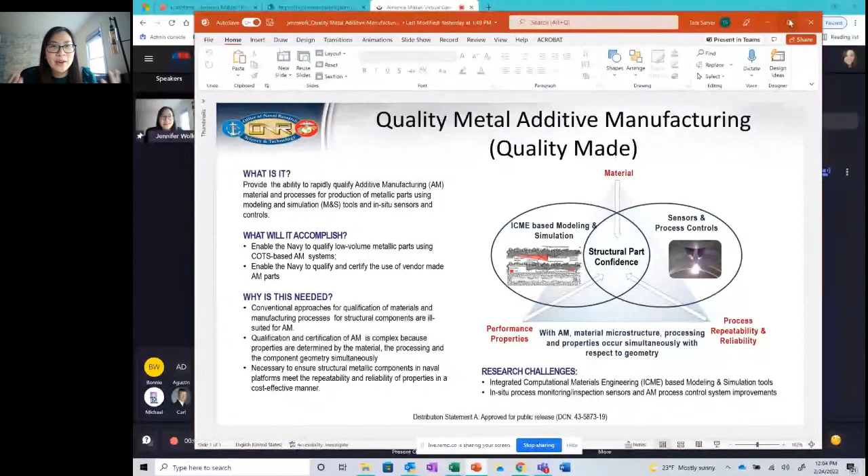Quality Made is the formal name of this program, Quality Metal Additive Manufacturing. What we're looking to do is change the paradigm of how we do qualification and certification. We have all been through the challenges of really trying to figure out, in the world of additive manufacturing, how are we going to build things reliably and repeatably to ensure structural part performance. Conventional qualification and certification is predicated on hundreds of test coupons to ensure we have material that's reliable, we understand the performance and properties, and we have process repeatability and reliability.

We lock it down to ensure that structural part confidence. But additive manufacturing allows us agility, it allows us the flexibility to change things, right? To go from an aluminum one day to maybe a different aluminum alloy another day. So if we want to be able to take advantage of agility, we need to be agile in how we qualify something and agile in that kind of understanding.

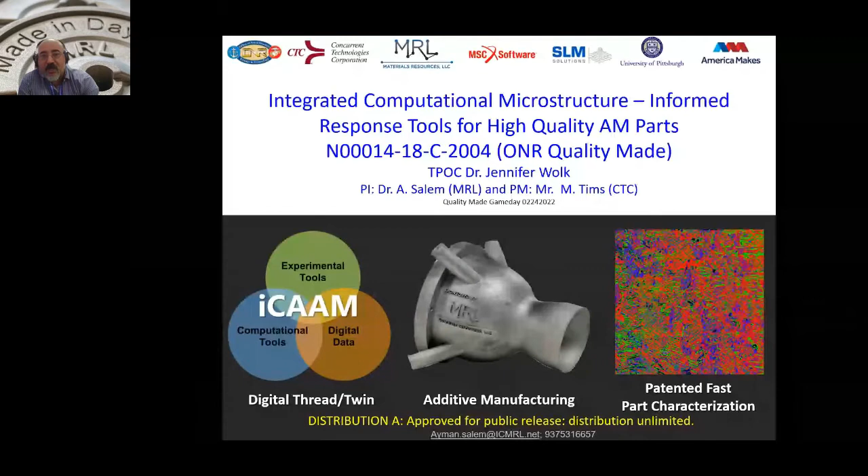I am proud to represent a team where Concurrent Technologies is the prime, and we are a subcontractor to them. Myself as the PI, and Mike Timms from Concurrent Technology as the program manager. Thanks to Jennifer and the Office of Naval Research for giving us the chance to work on this.

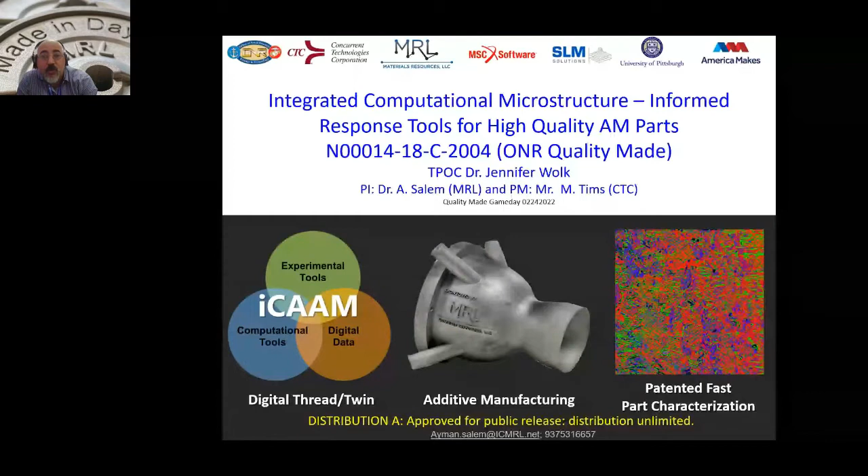Our team members include MSC Software, as well as SLM Solutions, University of Pittsburgh, and America Makes. We are looking at implementing ICME, Integrated Computational Microstructure-Informed Response Tools, for AM parts.

The whole idea, bottom line up front, is to provide the Navy with the ability to rapidly produce and qualify low volume metallic parts, mainly using commercial off-the-shelf laser powder bed fusion machines, integrated with our ICME tool set, as well as integrated with numerical simulations, providing the associated data through a very robust data management tool to enable qualification of the parts.

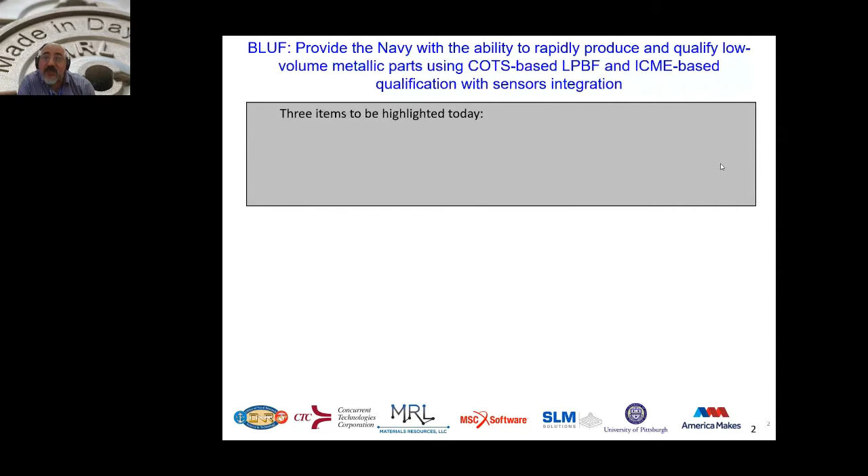With that, there are three items I'd like to highlight today. First, we will demonstrate the ICME-based system on an actual Navy component that we got public release to share with you. Second, we're going to share what we are trying to do to confirm repeatability and reliability at the component level, looking at strength and fatigue behavior.

And at the end, we're going to share our path for technology transition within the DoD, ONR, and also the larger audience on the OEM side.

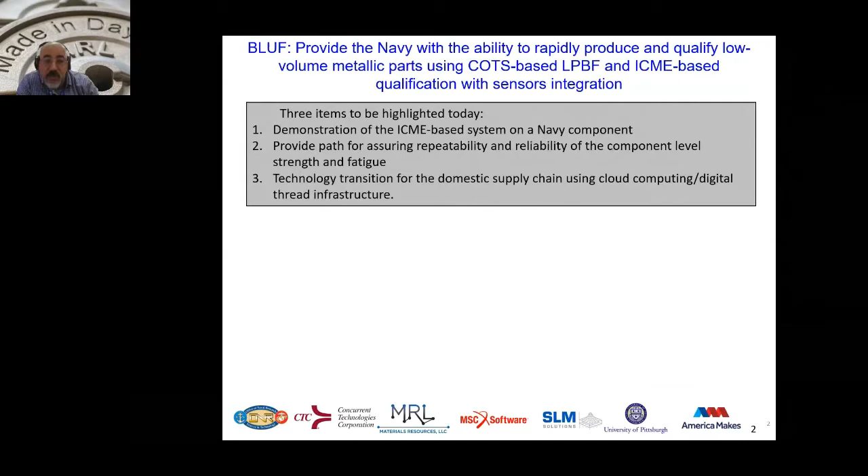Our team, as I shared with you, this is the infrastructure of the team: ONR the stakeholder, and other Navy team members as well, CTC the program manager, MRL as the principal investigator, and the rest of the team, MSC, SLM, University of Pittsburgh, and America Makes. Each one of us is responsible for one piece of this big puzzle we are trying to solve together.

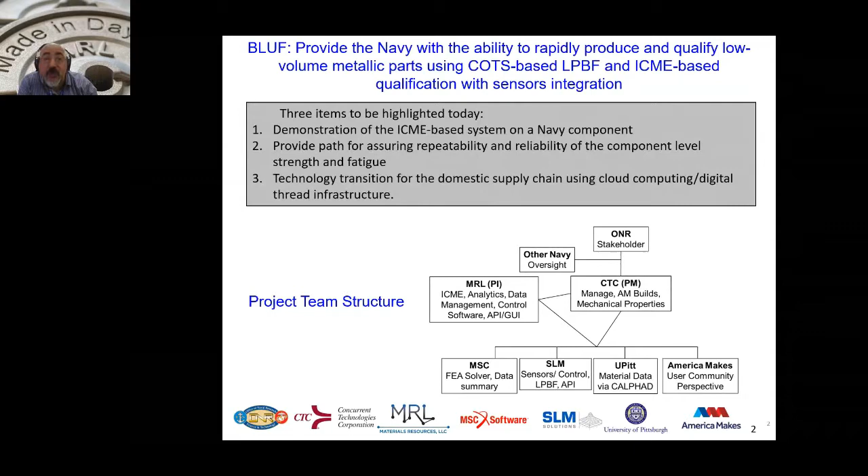Our approach focuses on integrating the cyber domain within multiple modeling and simulation tools within an ICME framework with an AM process, laser powder bed fusion, using the COTS machine SLM280, which is our physical domain, as well as the characterization methods that we are integrating with the results coming out.

With that, the steps we took are to link microstructure to properties and performance. We utilize an FEM solver, SimuFact in this case, with multiple modeling and simulation tools to incorporate material behavior within the FEM solver, as well as within the property predictions.

We utilize our commercial tool, iCAAM, Integrated Computational Adaptive Advanced Manufacturing Toolset, to link microstructure, properties, defect, and distortion predictions, as well as looking at both static and dynamic behavior of the material.

We are integrating with the SLM280 that comes with two unique sensors: the melt pool sensor for melt pool monitoring, and the laser power monitoring as well. We are integrating the tool to utilize the sensor data for defect detection, using the modeling to infer what the sensors are predicting for us.

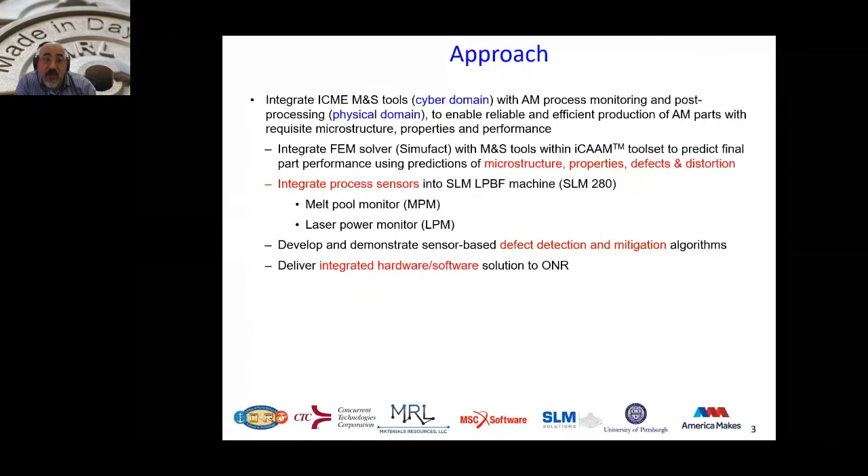And at the end of the day, we're going to develop a fully integrated system that we're going to deliver to ONR by the summer time frame.

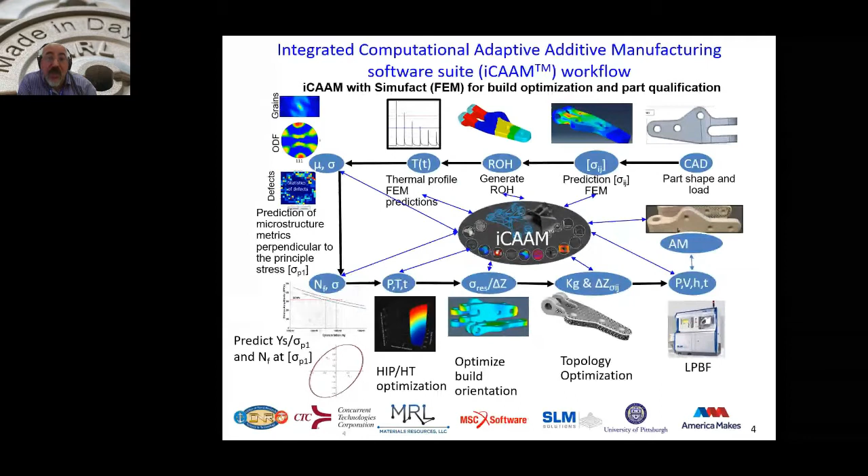Going through this quickly, the integration with the machine is the item I'd like to share with you. This is the current activity that we are working on, and this integration is taking three main steps.

The first one, we were integrating with them on the single, the total uncoupled method, is what we call step number one, where we are talking about the cloud data analytics. They send us information, we analyze it, and we link machine parameters to simulations to sensors data. And then the fog data analytics, where our machine will be taking information on a layer by layer basis, and we are in the middle of working on this.

And then at the end of the day, when we are submitting the machine and delivering it, we will be working on the edge data analytics, where the analysis will be done on our computer connected to the SLM machine on site with the Navy.

And with that in mind, I wanted to share with you quickly, and the image is a little bit stretched. For this case study, made of 316L part, the whole idea is, if we're going to do one or two of this component, we don't have the time or the money to make 100 of those and test them. If we're going to do one or two of this component, how our predictions will enable us to understand the location specific fatigue behavior as well as static behavior, and how that will identify the factor of safety related to it.

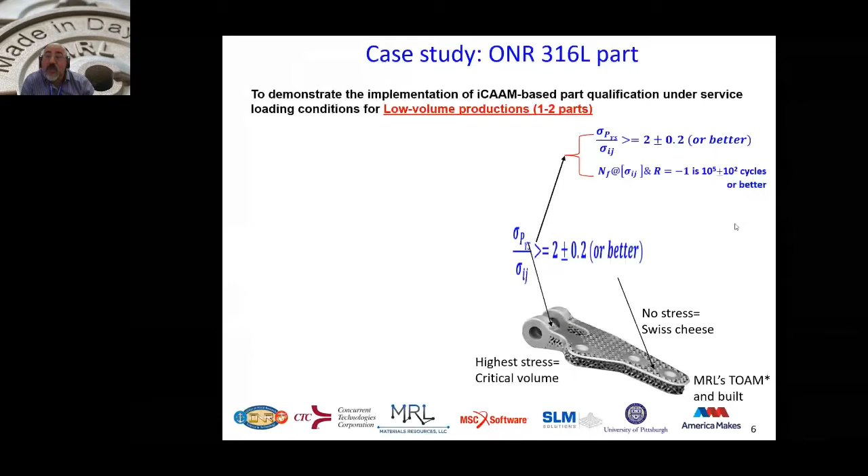So what we are looking at here is to understand some of these fundamental questions that we'll answer through the next few slides. When we are producing this part in SLM 280, can I build the two parts at the same time? What would be the build orientation? What type of machining should I have, and post-processing, heat treatment, should I have or shouldn't I? And when we topology optimize it, how will it look?

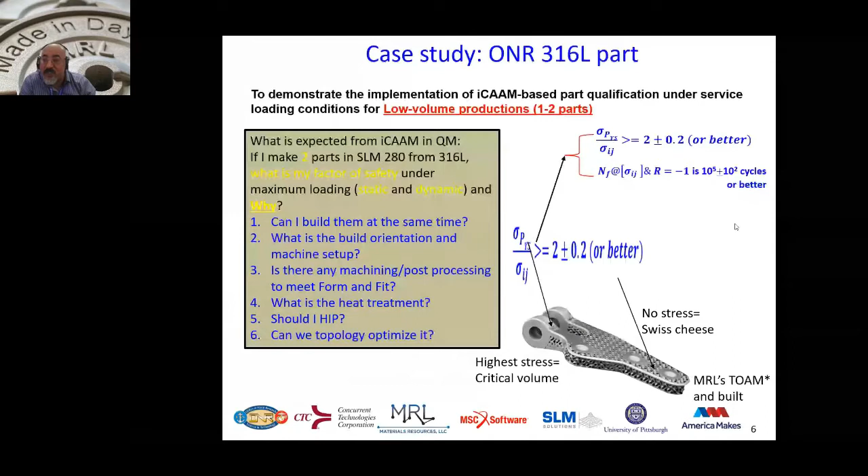So this is a quick slide showing the part in service, and literally how after we produced it, machined it as a solid, as well as after topology optimization. And we did the prediction for the fatigue and the static in advance.

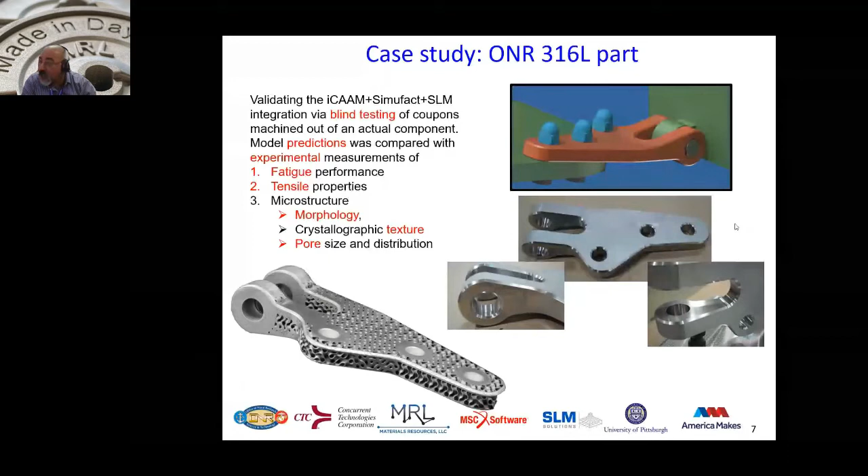And then there is blind testing experimentally done by the CTC team, where they took the part, cut it in pieces, and compared our prediction of fatigue, tensile properties, and microstructure morphology, crystallography, and the pore size and distribution.

The kind of slide you see in front of you is the STL that we built at CTC on their machine with our optimized build orientation, as well as support structure that was for additive manufacturability, and later on also for machinability of the part.

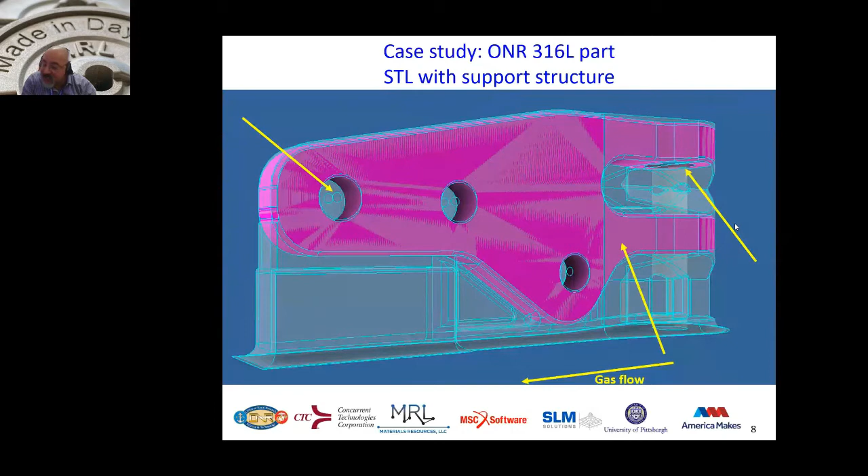Some of the features you see are related to how it will be easy to machine later on. In the details, we identified the most critical location as what we call the region of homogeneity of the feature vector, which takes into account the microstructure variability as well as the resolved stress tensor. We looked at this area to find the worst fatigue behavior.

With that, we put it in relationship with the gas flow. I have a quick slide later to show you how we have a virtual chamber that allows us to take into account the gas flow and the soot, as well as how we are designing certain holes that can later be easily machined, and how we choose them with the distortion, and how we maintain cylindricity of the part. The countersinking you saw was intentionally designed to guide the tool for machining later on. The support structure also controls distortion, and allows us to machine it later with wire EDM with minimum misalignment of the part.

The test plan you see on slide number 10 shows the location we chose as a team to pull fatigue samples as well as tensile samples. For every one of those locations, we had predictions of the fatigue life, the tensile behavior of the material, and the microstructure. Then Mike Timms from CTC later took this data and compared it with experimental measurements through a blind test that was shown to the Navy.

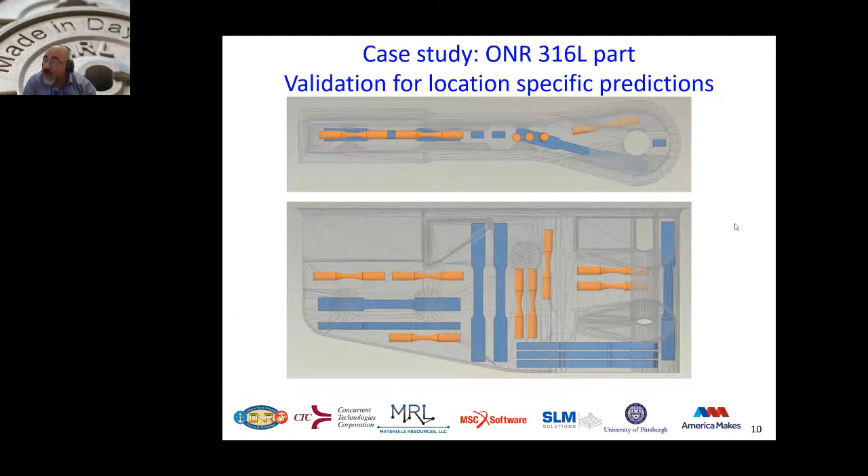Going through the slides again, we'll quickly take you through the process. This is the outline. The first thing, as you see in slide number 12, is that we identified the most critical region under the in-service loading condition, which we define as the region of homogeneity. Here we looked at the whole stress tensor - the 3x3 stress tensor, not just the von Mises value.

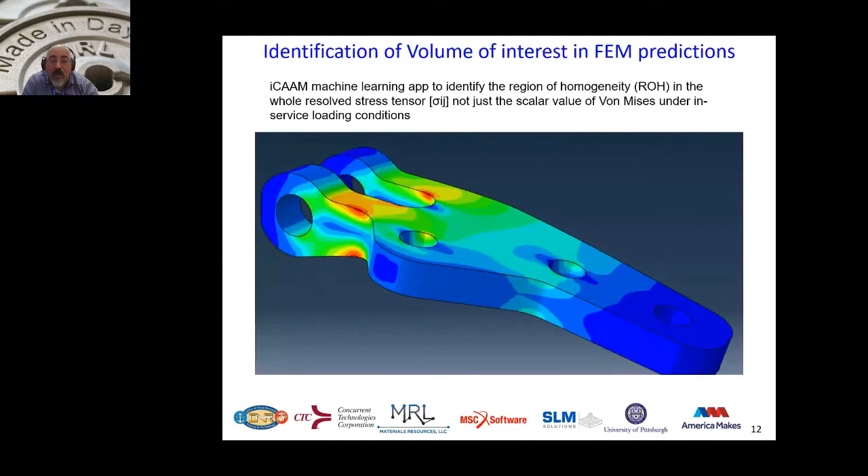With that, we have a machine learning tool to identify the region of homogeneity based on the whole stress tensor. It is generic, so it can be used in other parts generically, not just this part.

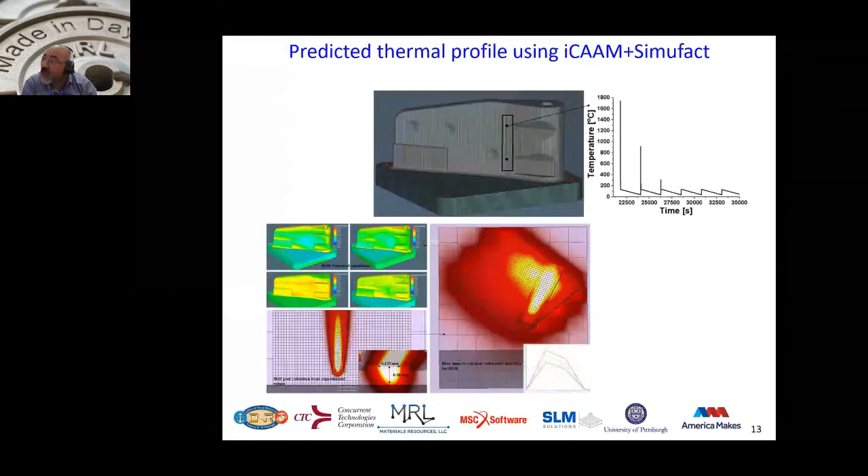Following slide number 13, you see our use of SimuFact tools to predict the location-specific thermal profile as a function of the scanning strategy and machine setup, including the laser diameters, and the calibration we did in-house with hierarchical simulations at the melt pool level, all the way to taking into account the material behavior at higher temperature, not just lower temperature, and then the location-specific prediction of the thermal profile as a function of multiple layers added.

The hierarchical simulation you're seeing on screen now, on the far left, captures the material behavior at the single track level, where we take into account the morphology of the melt pool and how it relates to the morphology of the solidified melt pool.

We utilize a unique trick that we developed at MRL. SimuFact was one of the few FEM solvers that implemented what we call crystal tracking. So instead of handling the whole FEM mesh, we are able to sample it, and some of this information is in the paper referenced at the bottom.

Then we take the information at the single track and go to the single cube, and as you can see, we keep track of the scanning pattern. We have multiple methods that we use to train our models to speed up the simulations drastically.

Again, we utilize the crystal tracking as well as looking at the regions of homogeneity within the part to transfer the thermal information from the single track to the single cube and later to the single part.

You are seeing the single part now being built layer-wise, and the information is fed at the layer level or at the regions of homogeneity, allowing us to capture the thermal profile in various locations. The most critical location helps us predict the microstructure as well as the post-processing we will need to do later on.

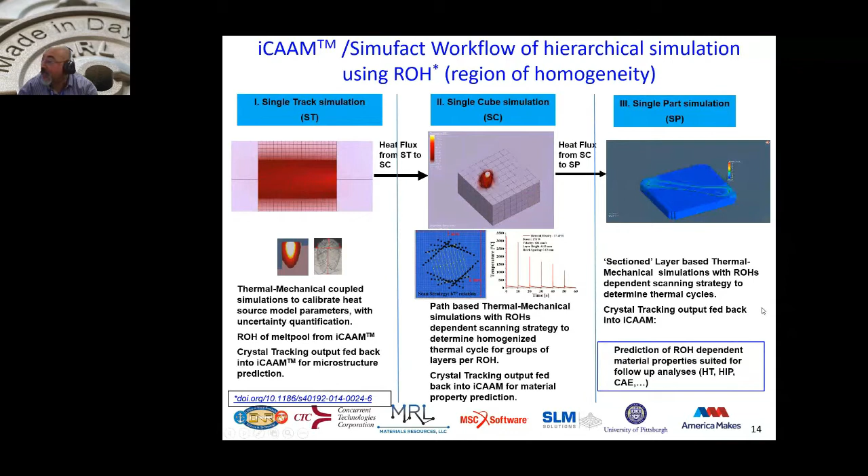With this information, SimuFact was used to predict the residual stresses, and this is some of the orientation that was selected.

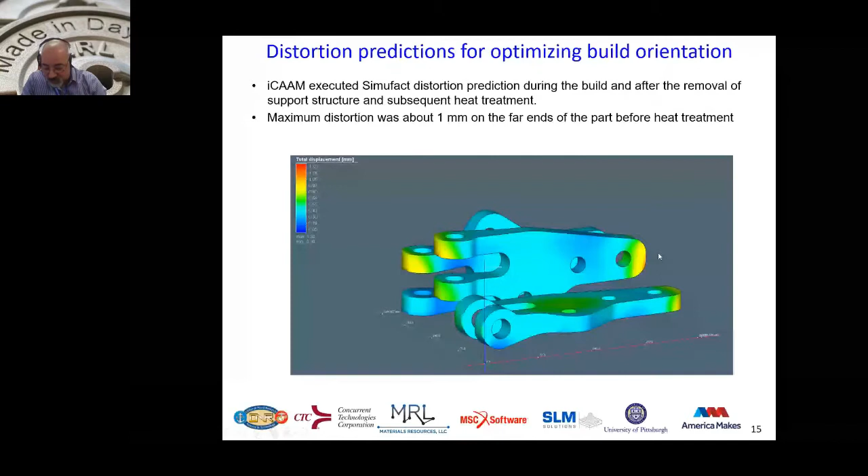We covered the 360-degree available orientation, but from those selections, we were able to predict that the maximum distortion in one of them was about 1 millimeter, but we were able to get the part to have the least amount of distortion as well as the least amount of machining required, and that's the part in the middle. That's what you saw in the prior slides, how we are able to build it.

From the post-processing level, this material is very unique, and instead of going with the conventional heat treatment approach, we have developed at MRL, through another funding from NavAir, an optimized heat treatment for this alloy that allows us to provide properties that exceed the performance of wrought alloys. So you can see we control the cellular structures, and we have to look at the residual stresses and the crystallographic orientations. When we implemented this heat treatment, we were able to optimize the behavior of the alloy, and that's what you will see in the results in the next few slides.

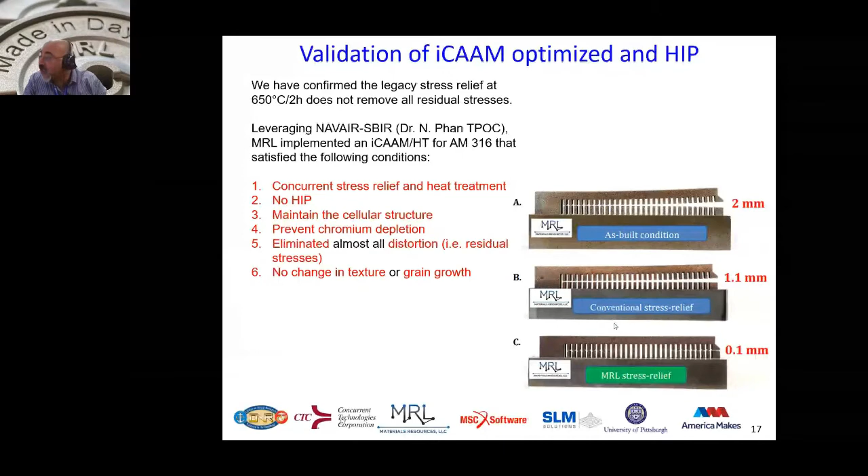What you will see in slide number 17 is comparing the as-built condition with the conventional stress relief process, and then with our stress relief approach. You can see we wanted to demonstrate it in the standard cantilever. The heat treatment approach that we developed at MRL resulted in less than 0.1 millimeter distortion in the cantilever. With that, we calibrated the models that we fed into SimuFact to be able to utilize this part for optimizing the build orientation, to take this heat treatment through the process and optimize the build orientation with it. This is the implementation on the actual part of this information.

When we are developing it, we are able to handle any arbitrary shape, and we are using an optimized inherent strain tensor that takes into account the scanning strategy and the thermal profile, allowing us to see where the location of the highest residual stresses and the highest distortion is. That's even before implementing our optimized heat treatment.

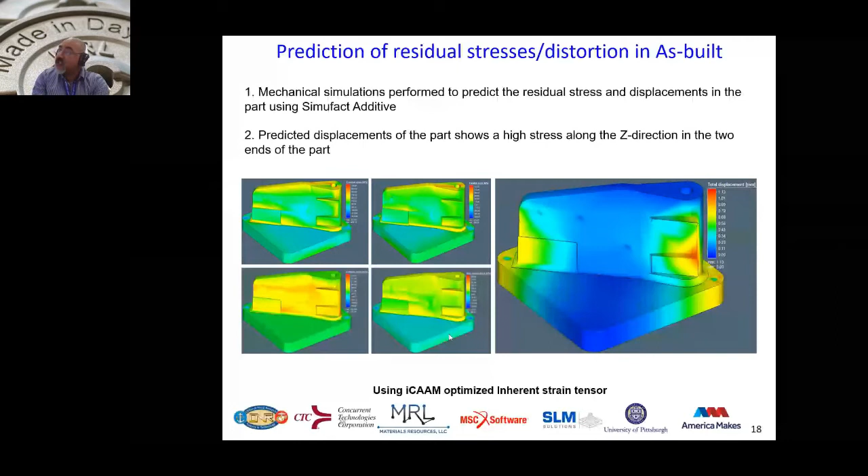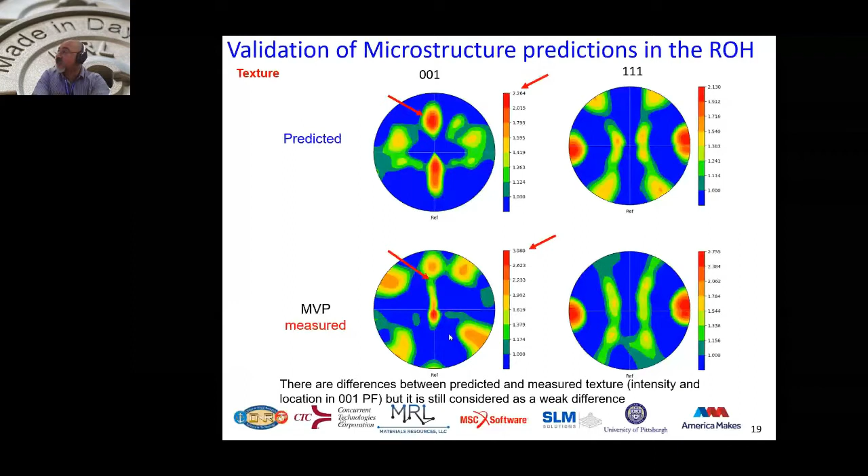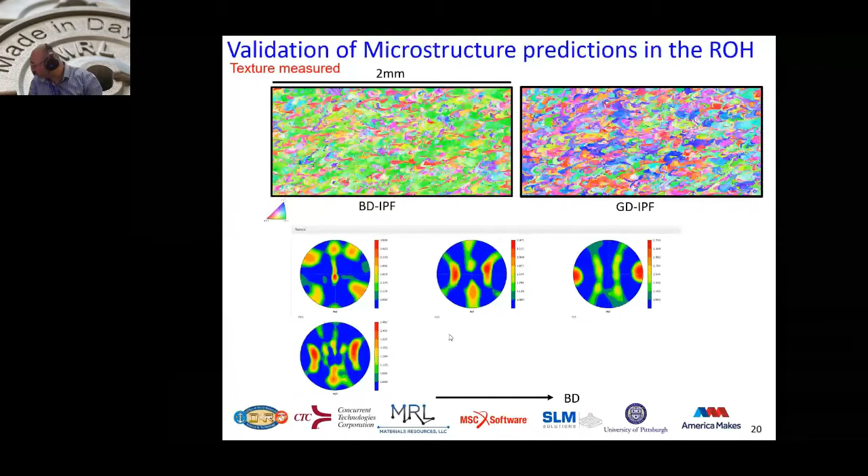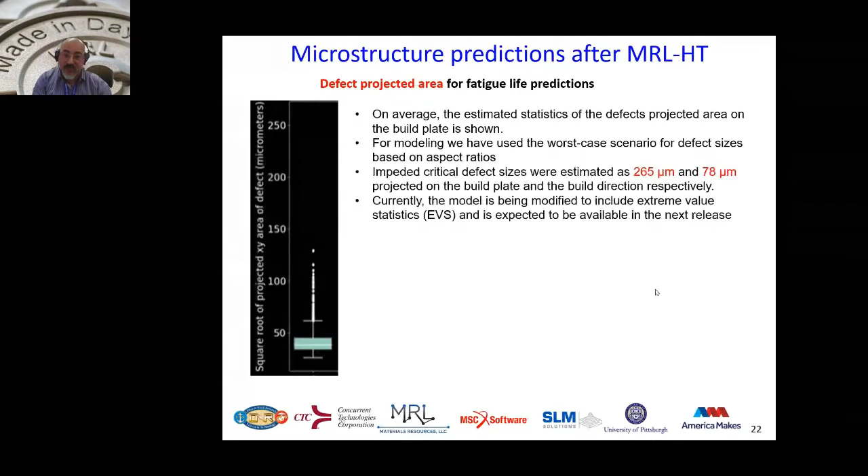One of the important things is that all this measurement was done on coupon samples extracted from the core of the part, at the pre-selected location that we demonstrated earlier in the first cut of samples, where we did both the measurements and the prediction.

The solicitation for this project set a goalpost for us comparing prediction and measurements, shown here on slide 23, where we compared with cast and wrought. We were expected to be within certain tolerances between the threshold and the objectives, and we'll show you how we compare.

This is where we are looking for repeatability and reliability of the data, which was confirmed with the blind test. We did a lot of simulations, predictions, and Bayesian inference, and the results were compared with a blind test using multiple experimental measurements, which we'll show in the next slides.

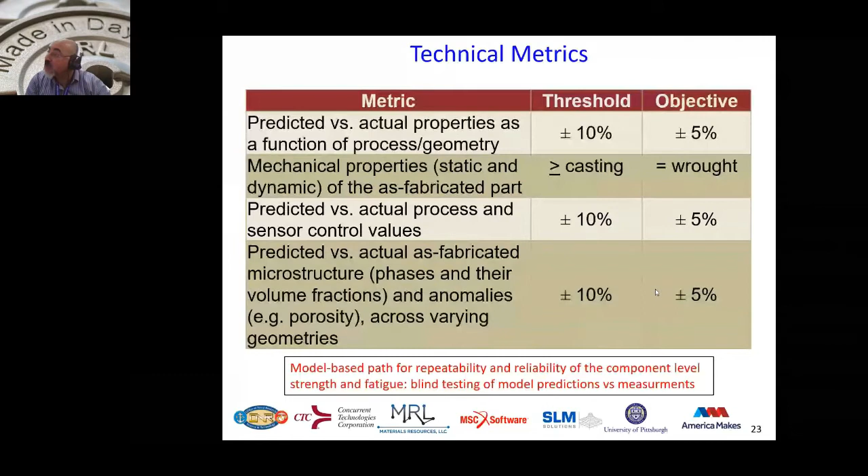So the first thing, looking at this slide, for the fatigue testing, we intentionally tested at 320 megapascal, which was a lot higher than the yield strength of the material, both cast and wrought.

You can see from the literature and the MMPDS S-basis information for the same material that we fatigue tested the material even above the wrought properties, as you can see on the screen.

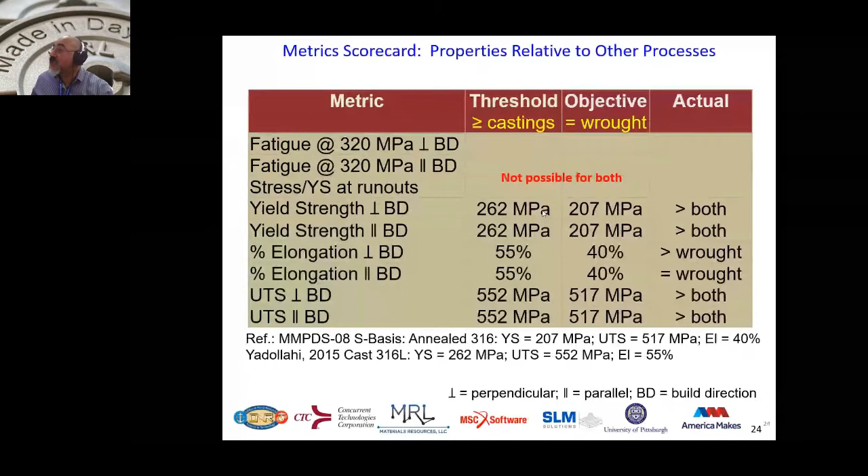The yield strength of the material, predicted versus measured, was within about 5% difference in the build direction. When we reached UTS, we were within about 3% between predicted and measured.

When we came to elongation percent, which has been the Wild West everywhere, the current parameters require a lot of information to predict the damage related to elongation percent. This is where we were a little outside the range, but this material is not expected to be plastically deformed. The approach we're sharing doesn't only apply to SLM.

We applied the same approach in other machines. We applied it to 3D systems, and we are in the process of applying it to EOS machines, and we also have a plan to apply it to RCAM machines.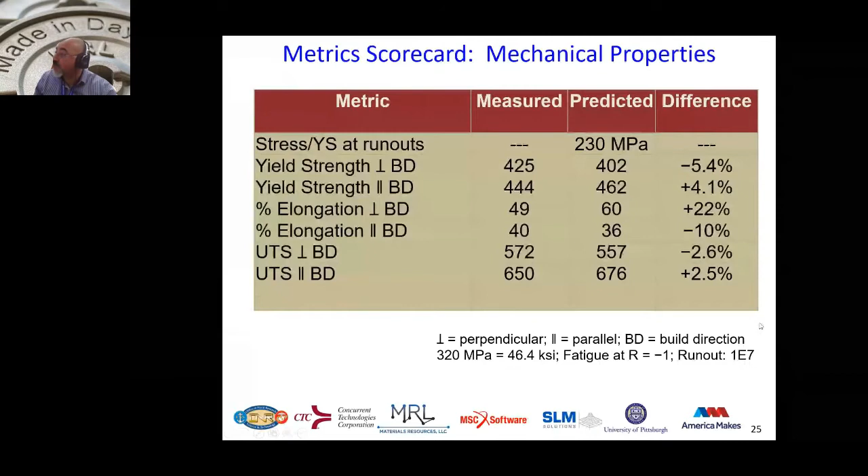One interesting thing we'd like to share: when we did the predictions, it covered both machined and net shape material. The difference is where the defects are located.

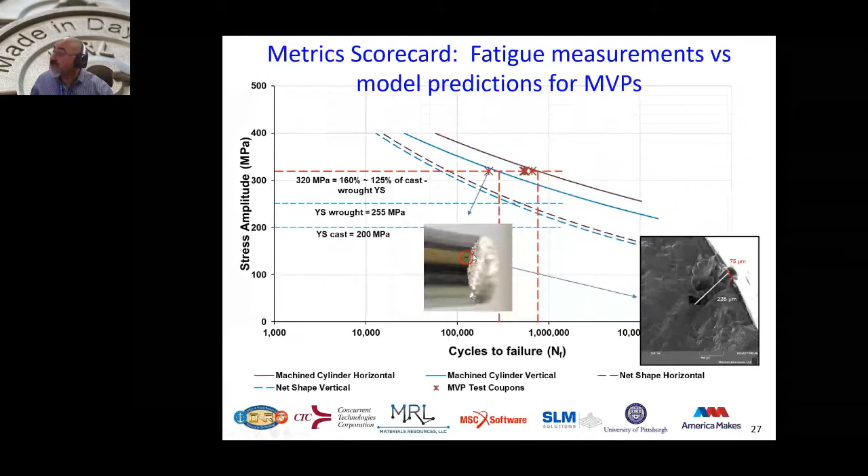That was another unintentional blind test. The prediction for the anisotropic yield surface, as we showed earlier, was within about 5% of the experimental measurements.

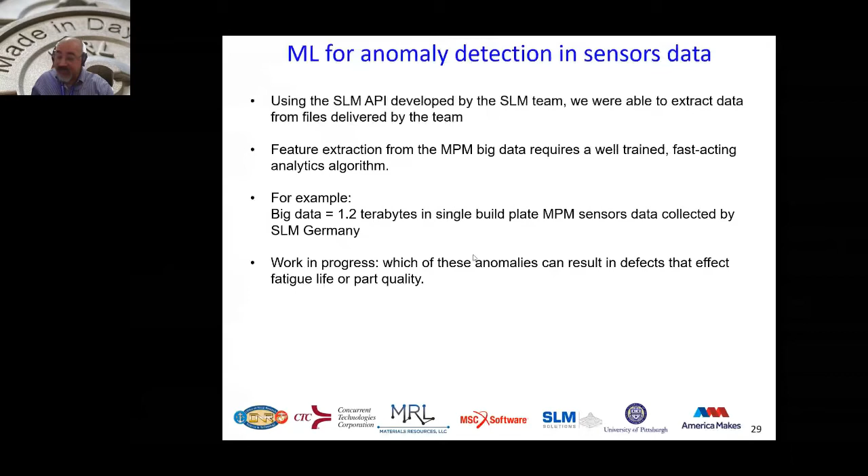We utilize a lot of comparison of the sensor data with the data we generated in-house in prior sensor work, and this is work in progress. What you're seeing here is how we calibrated our machine learning tools using work we did with the Defense Logistics Agency. This is our in-house sensor used to train our tools on the sensors from SLM, the melt pool monitor.

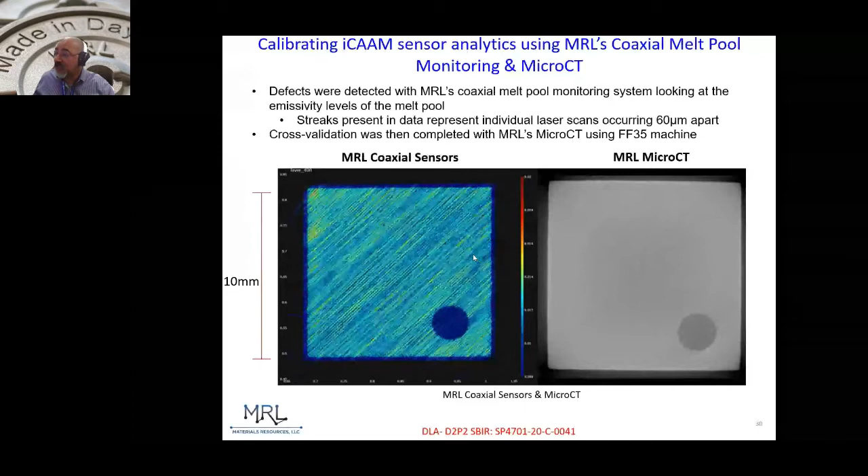What you're looking at is a cube with intentional defects. On the left is the measurement we did with the melt pool monitoring for the photons with the diodes, comparable to what we'd expect with SLM. On the right you see our micro-CT comparing, so we can nail down location-specific defects using sensors as well as micro-CT, shown here in 3 dimensions. We call this the calibration build cube for sensors.

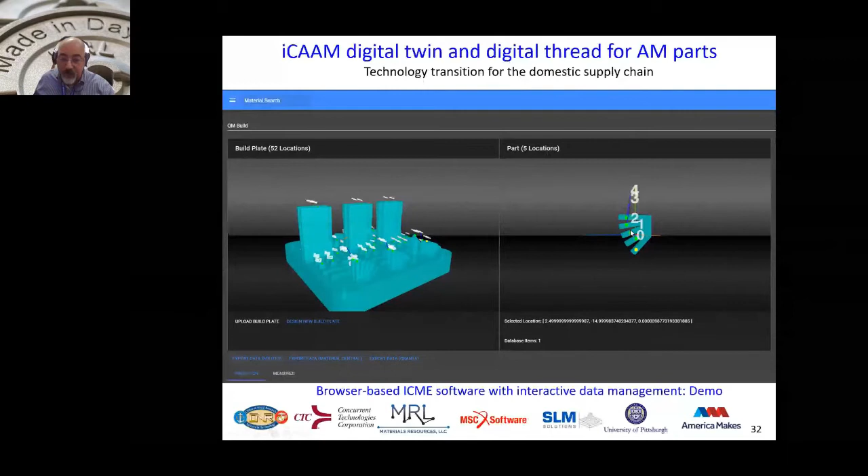When it comes to comparing the data and sharing it with others, I'll share with you in the last 3 minutes some of this browser-based tool we have, a virtual chamber that we're able to control at the part level, at the region of homogeneity. We're able to show the information, both prediction as well as experimental.

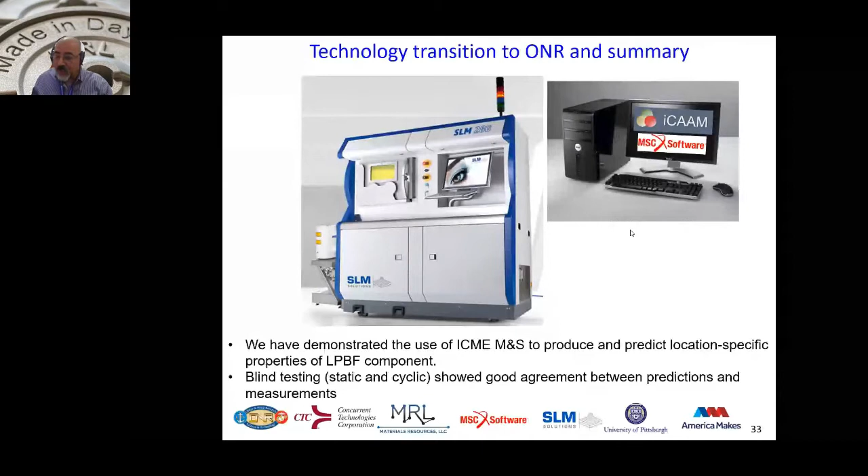By the end of the day, we're going to deliver to the Navy the SLM machine with the ICME, the iCAAM software with MSC tools, and the plan is to have them integrated together so it doesn't require a PhD to run it. A technician will be able to run the tools and build it based on optimized behavior targeted for fatigue as well as static loading.

With that, I'll ask the moderator if we have 2 minutes to show the demo of the software, or I can open it to questions. I'll leave that to the moderator.

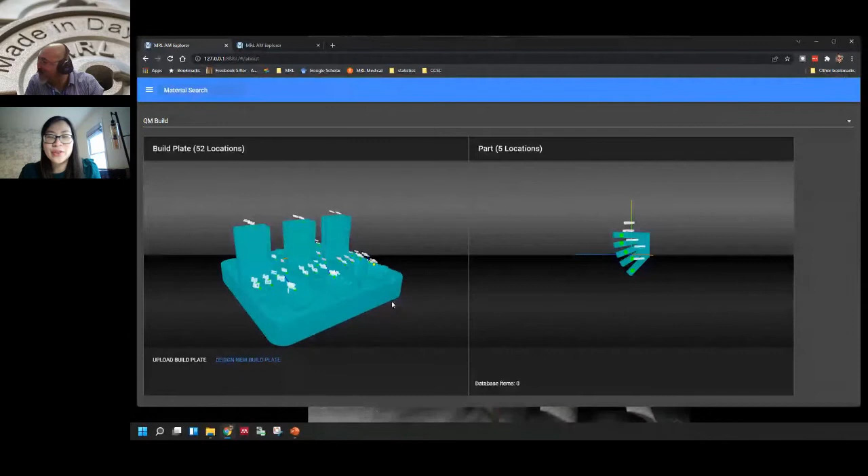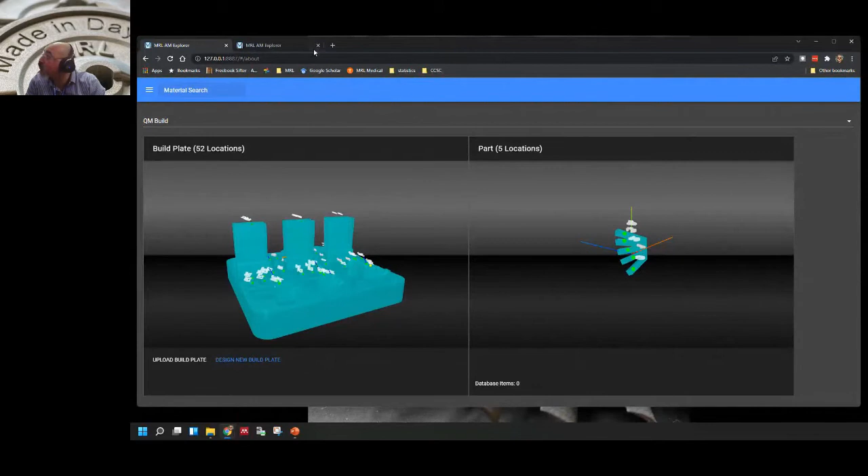On the left you have the virtual chamber that we are training on multiple machines, and we're able to upload different build plates. On the right is part-specific information. The yellow dots you see here are the locations of interest, identified by the region of homogeneity and the user. If you click on one of those locations, you're able to see the prediction as well as the measured information. At the end, once we're done, we're able to export the data in multiple formats.

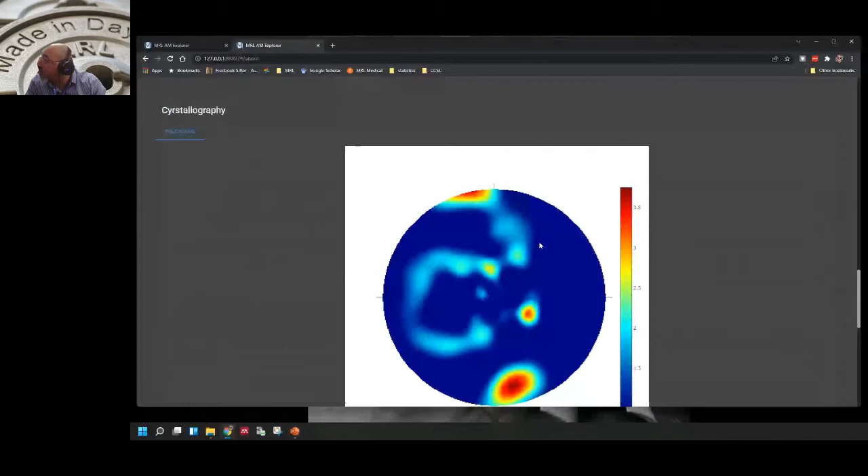One format is a SQLite database that can be read with any SQL database. We're also able to export it for Material Center, part of MSC software, and also export it to a Granta database. From the prediction side, as we shared earlier, we captured the change in chemistry due to the build, the higher order statistics, and the texture.

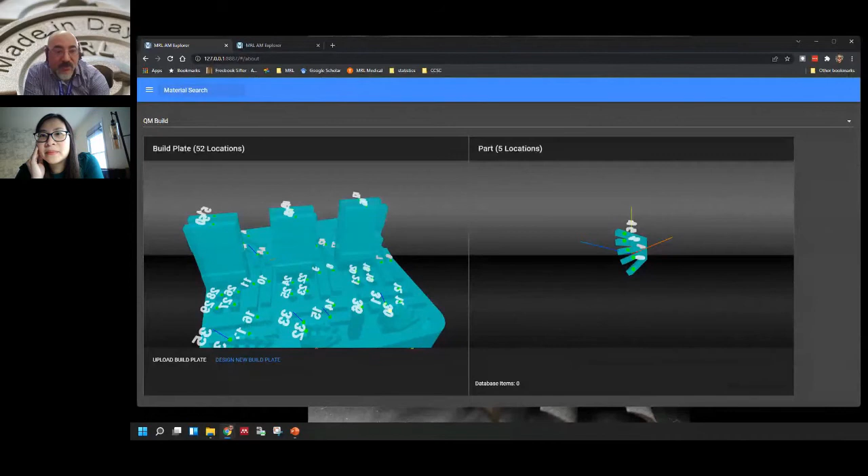How does the mesh of the thermal model translate to the mesh of the microstructural prediction? This is where it comes to the paper I shared with you on crystal tracking. We developed the methodology independent of the FEM mesh altogether. SimuFact implemented that very well. They use what other tools call particle tracking, where you have a marker within the FEM that averages the information and exports it. Once exported, you have a material model that doesn't need a mesh. What you have is a database of the thermal profile as a function of location, which you then call with the crystal tracking. The crystal tracking is volumetric information between four corners, and we demonstrated that using the deformation gradient for large plastic deformation in the paper published in 2017.

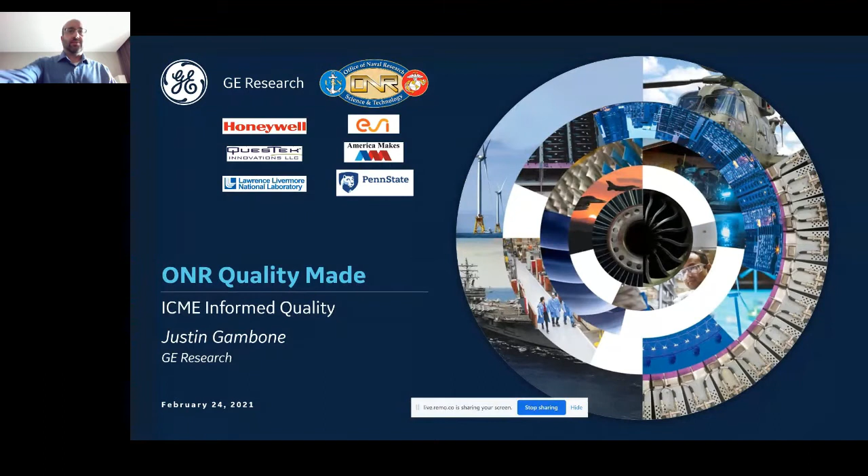So I'm Justin Gambone, from GE Research, working in conjunction with GE Aviation, Additive and Power. We are the corporate division of GE, and I am the PI for the ONR Quality Made effort that GE leads, the ICME Informed Quality Program. With this presentation, I'm going to run through a few different technology areas. Before I dive into the actual technology, I want to ground us in what we're trying to do for this program. For part qualification and certification, there's a variety of developments and procedures in place that really allow the progress of qualification of a part to be elongated, so it can take some time to get through all of these steps.

I'm not going to go through all the details here, but everyone on the line is aware of these challenges. Qualification means you have to complete your first print, get past build crashes, move towards conforming geometry, and eventually towards more material-specific questions and low-rate production scalability.

Similarly, for certification, when scaling capabilities of additive manufacturing across more machines and a full fleet, you have to look at how things can change in the additive process and ensure everything stays consistent and within spec. I'm using this as the framework for today's discussion to talk about how the quality made effort fits into these paradigms.

Let's talk part qualification first. The impetus behind this quality made effort that GE is leading is around taking insights and developments from process qualification. When working with a new machine architecture or new material, we go through a qualification procedure for that specific material to formulate all the knowledge in a more representative manner that can be leveraged toward part qualification and certification.

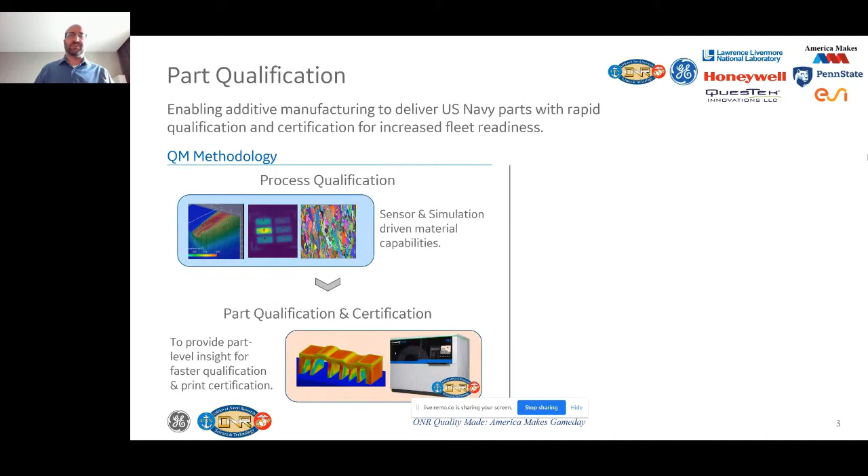So all of our material insights, sensors, controls, and simulation capabilities from process qualification are used to pull more of that knowledge toward part-specific areas so we can more quickly move through part qualification and leverage it along the certification pipeline. By doing so, we're looking to augment and accelerate every step along the way for a part qualification procedure.

On the right side of my slide, I have the five toll gates shown previously. With quality made, we have a variety of technologies meant to build on top of one another, allowing us to more quickly iterate and converge on solutions for each of these toll gates.

Just shown on this slide are a few tidbits of the technology areas. For completing a first print, we have orientation optimization, taking into account overhanging regions of a part, support generation, and recoater interactions to identify the best potential orientations of a part in the machine.

For geometry, thermal simulations allow us to understand part distortion effects and compensate for them so we can get to CAD conformity more quickly in the part development process.

Feature quality leverages an intelligent feed-forward control strategy, giving us more localized control of our additive process. When needed, we can adapt our process procedures to account for variations in the geometry, which induce differences in melt pool behavior during the print process.

Material quality leverages quite a bit the ICME-driven material prediction capabilities for Inconel 625, helping us understand the reliability and robustness of the end result material quality.

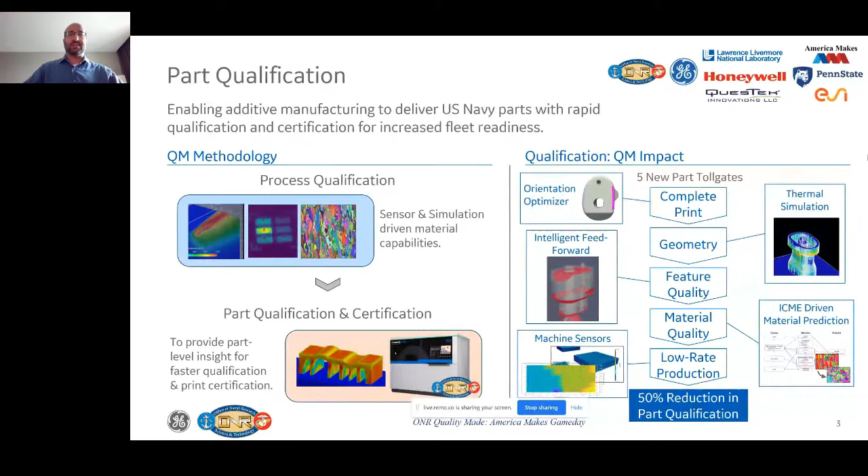As an end result, all of this is meant to drive towards faster part qualification. We have to do all of these steps, hitting every one of these toll gates with acceleration technologies to see a major reduction in part qualification time.

My example today shows how we interconnect some of these technologies to accelerate and pull insights from process qualification to part qualification, around intelligent feed forward and its convergence with simulation. Intelligent feed forward is a technology developed out of Lawrence Livermore National Lab, one of the members of our team, that looks at doing localized process control of an additive part.

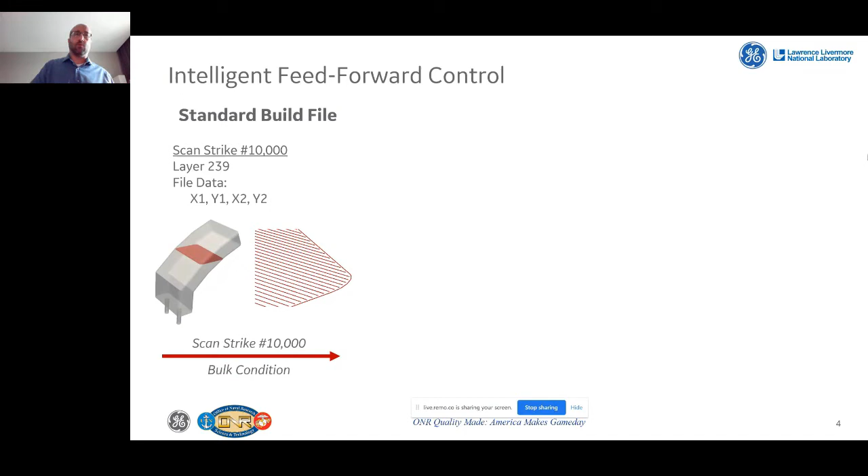The procedure we take is to create a standardized build file, essentially a template for the part being generated across the 3D geometry, and put that through an analysis, doing feature extraction to identify where certain variations in the scan path occur during the print process. In this example, we're looking at regions where an overhang can occur.

We're essentially looking at a laser strike during the processing of this part, trying to identify where we start approaching the overhang region. With segment 123 shown in the center of this slide, it's the bulk region of the part. But as the laser strike goes closer to the edge, towards that overhang section, we identify that very far edge, where 128 is earmarked as the first layer above an overhang, and 127 is the second layer above that overhang.

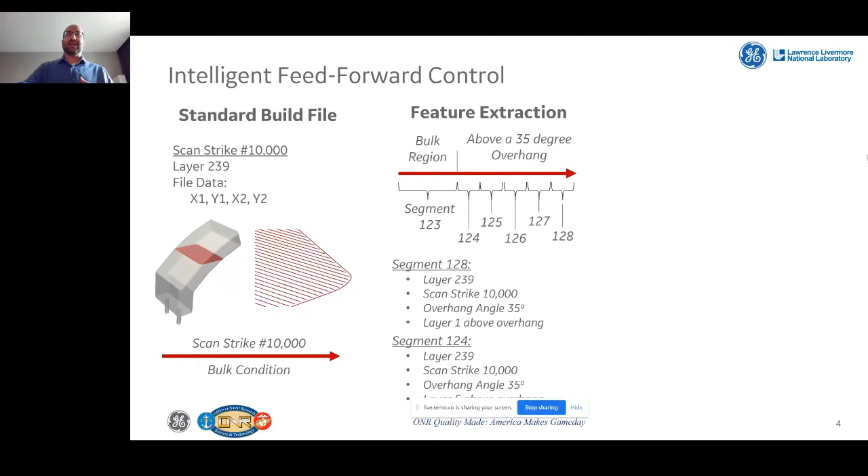This type of demarcation of process variation along that laser strike allows us to have more localized compensation and control, giving us a more measured response to that change in process behavior.

So taking that single laser strike that goes from a bulk region towards an overhang, we can take that same continuous laser movement and modulate the laser power or focus along that length, creating a gradient that steps us towards a more optimized scan strategy for an overhanging region of a part.

This allows us to have no stops and starts, but gives us a smoother transition between different features of parts and allows more tailored features as required.

When we look at this type of technology, this control methodology on the machine, there's a lot we can consider: 1D features, like what direction the scan strikes are going; 2D features, more area-based understandings of wall thicknesses; are we entering a corner of a part or not?

Then there are 3D features: the level of an overhang, the height you are into a part, how far from the build plate you are. For every laser strike, you could have many different types of features associated with it—an overhang region that's also a corner, or a tall section of a part that's also a very thin wall. It's important to understand all these variations and use IFF to accommodate changes where it's actually important.

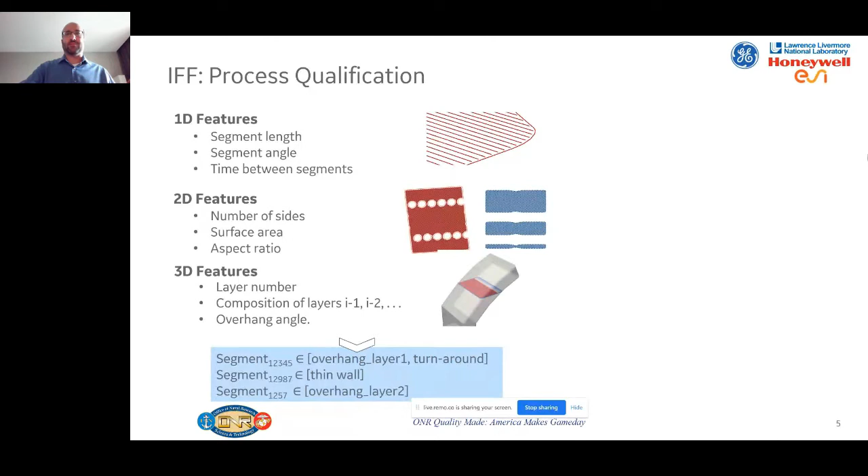To help accelerate this, we started tying in simulation capabilities. For this example, we're taking intelligent feed forward capabilities for scan path control and leveraging thermal simulations developed by ESI in association with Honeywell to look at strike-by-strike material response of a geometry and see what the thermal response looks like for that part.

We're looking at individual strikes associated with the IFF outputs to see how the thermal response changes, in this case regarding the overhang area and the length you are into an overhang, to see what the thermal variation can look like. This allows us to identify if a feature matters, how much so, and how to control it.

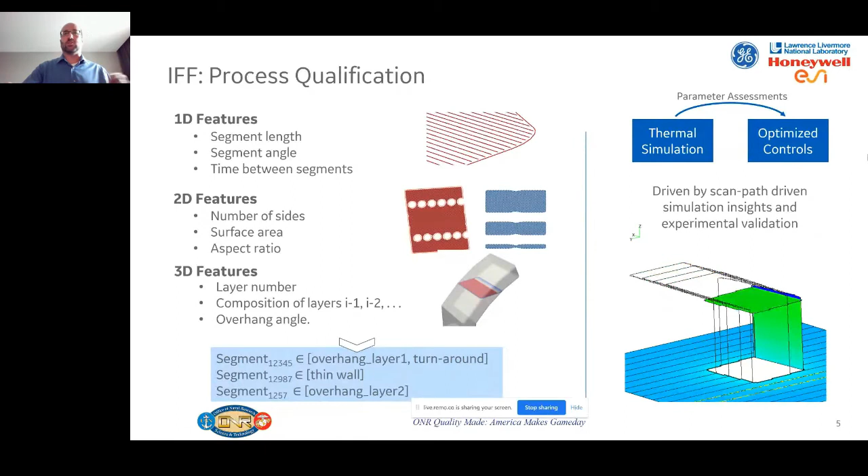So we're able to pull thermal simulations to have optimized control during our process qualification stage. But furthermore, we can leverage this in the part qualification procedure, now having tailored control strategies around critical feature sets we know we need to control better in the additive process, and we want to leverage those in part qualification.

IFF itself, Intelligent Feed Forward, is meant to take those same feature sets developed under process qualification and apply them to new geometries, identifying similar feature sets when we go to a new type of design. Furthermore, we're able to close the loop between the controls and that thermal simulation.

We can run that same thermal simulation strike by strike on a new, tailored geometry that we're looking to do process qualification on. It can provide assessments around thermal buildup of regions, show optimal orientations of the process, and give an understanding of the impact of our tailored control strategies.

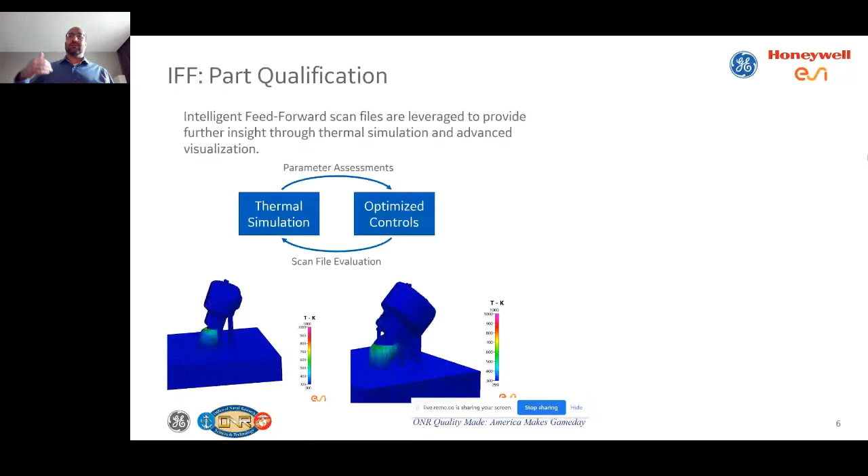Taking this a step further for intelligent feed forward control and this level of insight into scan path control of an additive system, we can illustrate how scan paths are applied to a new geometry, informing the qualifying body of where and how feature sets are flagged and identified through advanced visualization capabilities—going a step beyond what's typically seen for additive technologies, where you look at essentially a layer of the scan path at a time, shown on the slide here along the right.

We're now also able to overlay these same type of scan path controls with the CAD model, so you get a one-to-one view of where and how control strategies are being added or used to mitigate new types of design features.

A step beyond that is looking volumetric, at the entire 3D body of a part geometry, flagging or showing regions where certain feature sets are found, identified, or controlled using intelligent feed forward.

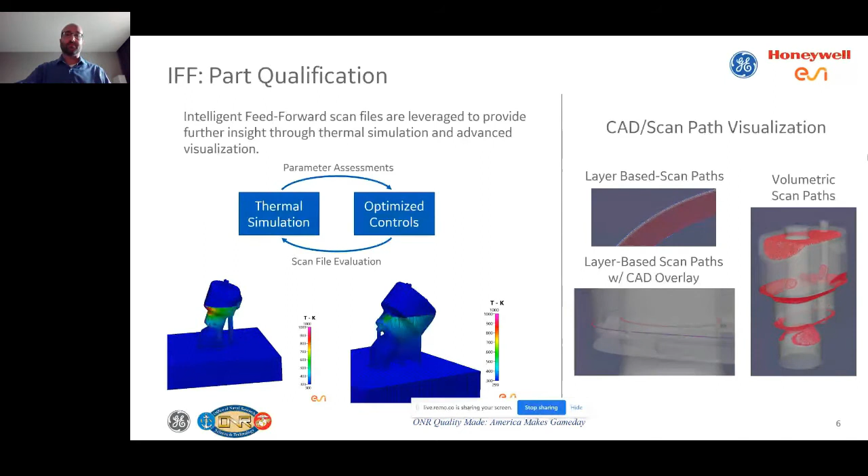This CAD-oriented understanding of process space is also the same metric used for thermal simulations. That's one example of how we're trying to leverage advanced controls and simulation to provide faster insights into a new process, and also leveraging our process qualification towards new parts.

I also want to touch on certification. It's an important aspect of additive manufacturing that we need to understand better and push ourselves to characterize as we scale additive manufacturing beyond just a few units. Qualification is about proving the capability of a new geometry to show consistent properties relative to our process qualification, while part certification is really about consistency.

We know we have a good geometry, a good scan path, a good build process parameter, but now we have to make sure that as we scale from one machine to 50 machines, and those 50 machines from a single build to years of operation, that we keep everything in check.

That means system level inputs, making sure our material feedstock is adequate. Our build process, ensuring we have consistent build environments during the build process across that fleet of systems. And even post-processing, looking at powder removal or heat treatment and ensuring consistency in those regions.

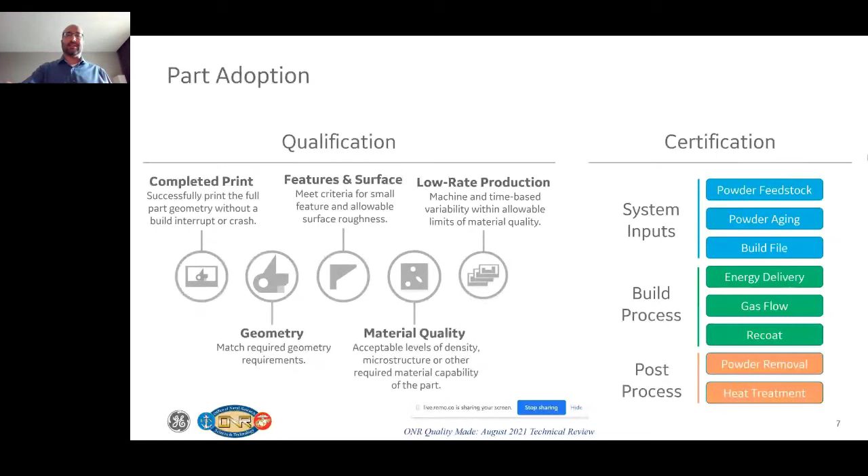It's important for us to understand the bounds of these, but also be informed of why those bounds exist, because when you scale additive manufacturing, things are going to vary. With different sites, different operators, and over a long period of time, things will change in the process, and we need to be ready to answer questions when we find those deviations occurring.

For the Quality Made program, we've leveraged similar technologies to those shown in part qualification, now applied to part certification. We're using sensor-based systems developed by Penn State, a coaxial multispectral sensor that looks down beam at the melt pool behavior.

Penn State is also looking at the build process from a gas flow environment, creating a new module that goes into the chamber so we can measure gas flow across the build region in as unobtrusive a manner as possible. Another area I'll touch on next is ICME simulations.

We've leveraged ICME simulations in part qualification toward optimizing heat treats and understanding the resulting impact on mechanical properties. We took those same simulations further to drive insights around powder feedstock and heat treatment profiles, diving a bit more into this ICME-driven insight.

We have a fairly complex ICME model that takes into account the initial chemistry variation of the part, as well as the different types of heat treatments seen during the build process or post-process steps.

Once we built that type of model, we immediately started asking questions around what if the compositional variation of the feedstock powder changes? Even if it's within spec, what if it's at the upper limit or lower limit? What if it's out of spec?

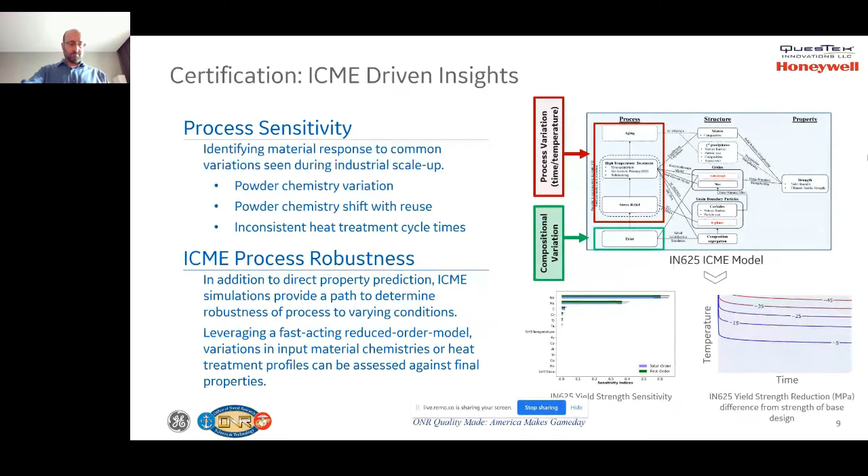And then finally, the last area I want to touch on towards the certification end is again the sensor-based aspect. I already touched on this, but during the print process, we want to ensure that the build chamber and our build process procedures are consistent print to print and across fleets of machines. So we have integrated a sensor system into the additive process that allows us to look at narrowband spectrum

of emissions of the melt pool itself, so we can understand where and how process variations occur. In addition to this, we've also developed with Penn State a calibration procedure for this. Actually, that led to the gas flow sensor that was shown previously, a way for us to get a calibration module within the chamber unobtrusively so that we can get the right information to level set the sensor across a fleet of printers and also a printer over a long period of time.

And what this provides us with now is a calibrated data set for each print that we can then understand the impact towards process variations and inform NDE experts around changes in that process and where and how they occur.

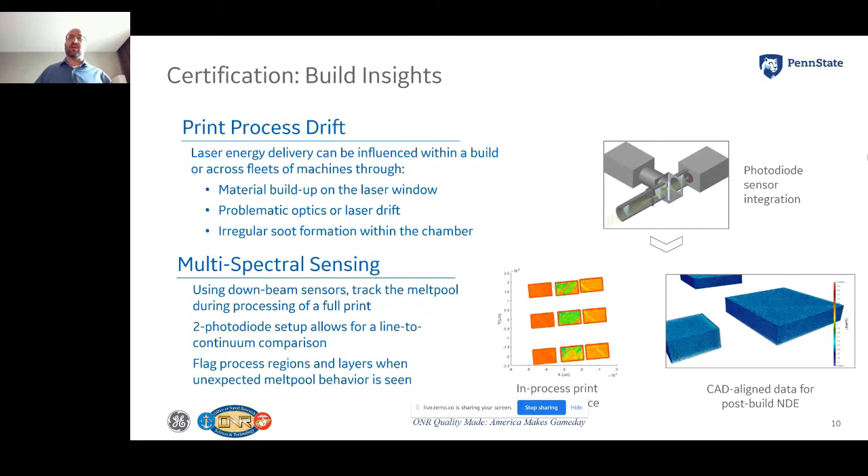So overall, just walking through a few examples of this ICME-informed quality program that we have in conjunction with the Navy, where our next steps are really pushing towards transitioning this technology to Lakehurst site with a Concept Laser M2 system, integrating the sensor work and all the different software and simulation capabilities.

Now, at its heart, this program is a technology framework that combines advanced simulations, controls, and advanced sensors so that we can understand and better predict the build process. But also, by aligning all those bits of information, we're able to start really leveraging the additional understanding that each provides so we get higher confidence in a new part geometry as we go through part qualification, and can refer back to that same type of insight as we go towards part certification.

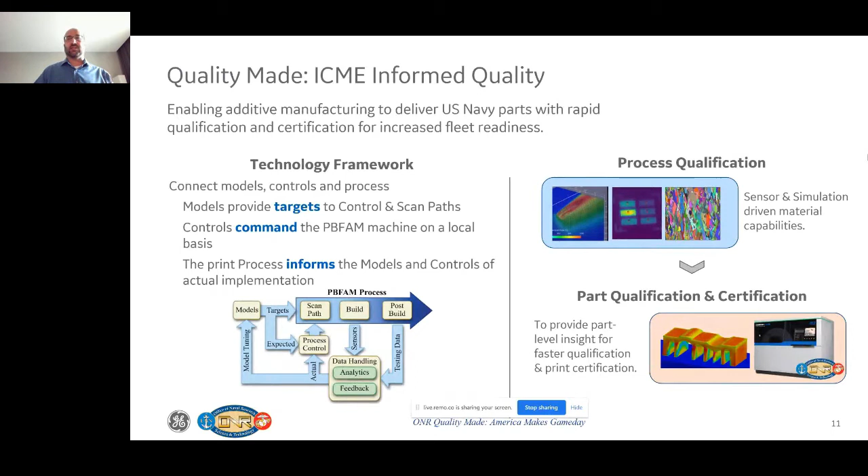And with that, I think we have some time for questions. Happy to answer anything that may come up.

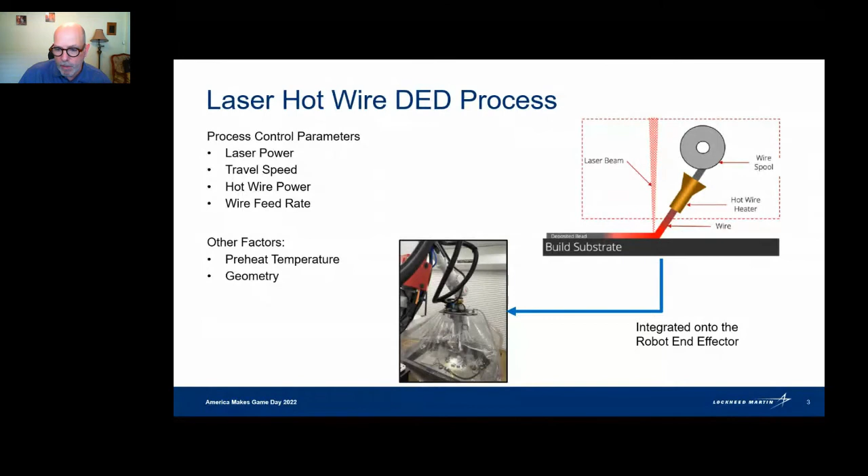That requires an inert environment, which we obtain using literally a tent, if you will, to purge the environment while we're conducting the build. The reason we do this is because of the specific system we use—this robotic system you see here—and I'll get into more detail on that in a moment.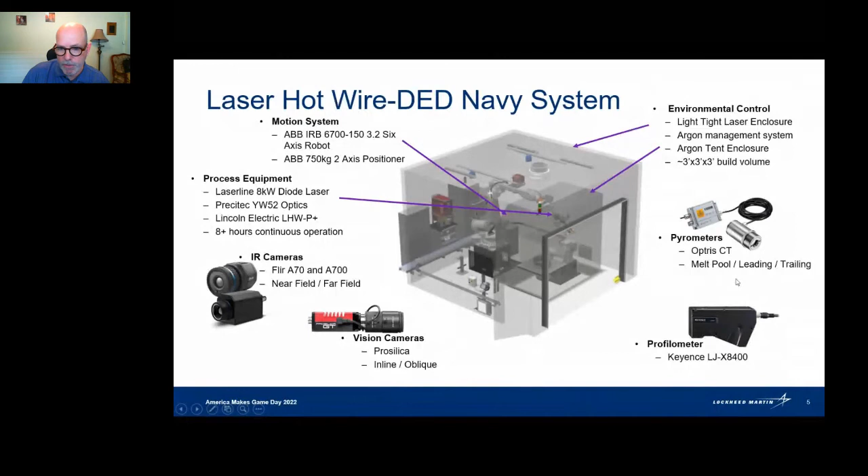Essentially, we've had a fairly determined build progression. When we initially started this project, we laid down simply bead on plate. We didn't even try to build upon the laid down beads, just to get a better understanding of the process control itself, and what the process windows look like - what our schedule parameters are. I mentioned those 4 different control parameters, what those parameters look like and what they produce within a given boundary. So we used that to get a reasonable approximation of what a good set of schedule parameters would be.

We progressed on to doing stacked walls, is what we called it - basically just one bead on top of another. There's not 2 beads aligned here, it's literally just a vertically stacked wall. And then we went on to build large block builds that are multiple beads across - multiple beads going across, and then multiple beads stacked up.

We went on to build a more complex geometry. Unfortunately this isn't the best view, but essentially this is a large wall build with another perturbation wall that's a single bead layer going up, and is actually angled down as it goes out. So we progressed to that more complex geometry.

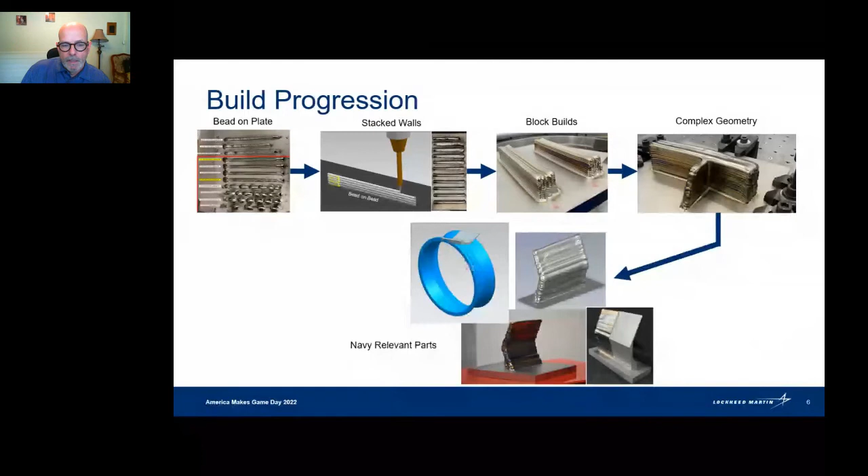One of the first things we did, I mentioned process maps. So what Jack Beuth and his team learned initially was that we needed a process window within which we could have a reliable deposition, and something that would deliver a good quality deposition in each different bead that was laid. So it's important to deliver the right amount of energy into the melt pool.

So what you see here is that Jack Beuth and his team have defined what they call a remelt ratio. Basically, depending on the process parameters, how much energy you're dumping into the material, as well as how quickly you're feeding material into the melt pool, you will remelt some of the material in the substrate or the previous builds, and then add some melted material. Jack's come up with a formulation for remelt ratio.

And then he developed these process maps. The essential part of these process maps - they are color coded, and you might guess the red section is a place you don't want to be, and the highlighted green sections are really what I'd call the sweet spot. So through a variety of experiments, a DOE if you will, on the more relevant process parameters - the total power, the velocity, which is the travel speed, and the wire feed rate - we've been able to define these.

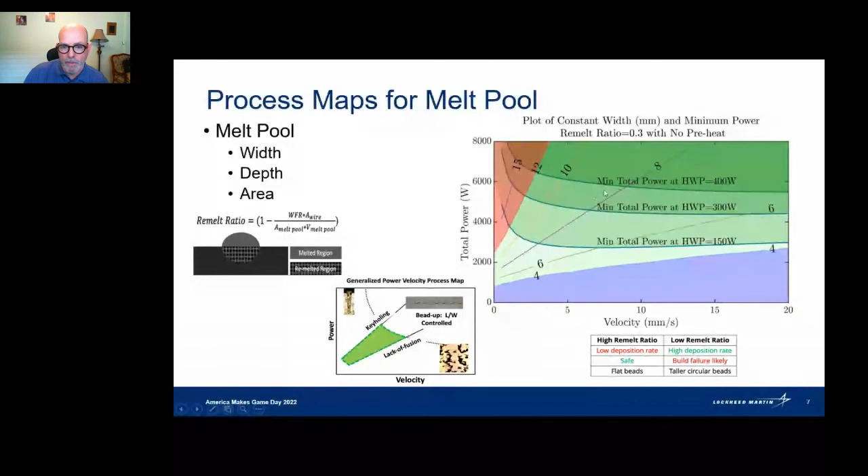What Jack's team would do is define a desired remelt ratio, and we'd conduct builds such that we could build maps showing, for a given hot wire power, what the total power was—a combination of both laser power and hot wire power—that would give us a good build. These contours define regions outside of the green highlighted area where you'll either get a keyholing effect, dumping too much energy into the part, or get a dripping boundary. If you get below the contour for a given hot wire power, the wire will drip into the melt pool and you'll end up with an unstable build, which has significance you'll see later. The essence of these process maps is to help define a good set of processing parameters across the entire build profile.

The overall workflow through this framework starts with the thermomechanical modeling. As I mentioned, Jack was able to define these process maps that help give us a better idea of what the optimal process is. But then for a specific geometry, we'd also conduct thermomechanical models, via either finite element analyses or simple analytical models of the geometry, that let us understand the thermal history throughout the build of the product.

The essence of understanding the thermal history is that it feeds back into the models Tony Rollett's group uses for the material state, to understand the morphology within specific areas of the part. The thermomechanical modeling also helps us understand a reasonable, or optimal, scan strategy for a part. These models predict both distortions and residual stresses, as well as feeding that thermal history into the material state models.

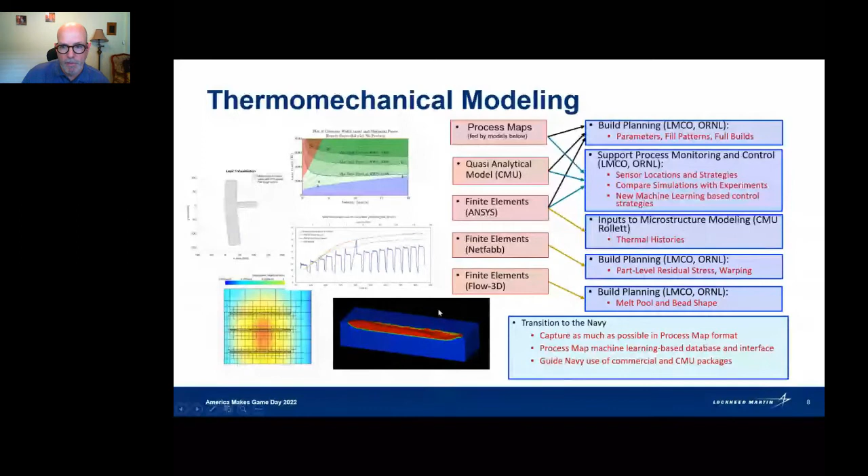The next step in our workflow is to take that thermal history—this is where Tony Rollett's group comes in, using that thermal history to understand the material state for that particular build. These microstructural predictions take into account the detailed thermal history within each cycle for the TI-64, mainly for the influence on the previously laid beads. The subsequent heating is really important to understanding that morphology.

One of the really relevant discoveries Tony and his group made—it's difficult to see in this particular stacked bead, but if you look closely there are white bands evident across the sample. Initially I defaulted to thinking those white bands were tied to the bead geometry, each layer as we went up. That's not true, though—the bead layers can actually be seen in the geometry of the part itself. These white bands were actually a byproduct of the thermal history, having to do with the amount of reheating and how close we were to the transus temperature. Tony can give a much better explanation if you're interested. The point is these models were able to predict the occurrence of these small banding regions throughout the build of the layers, based on the thermal history each layer saw as the build progressed.

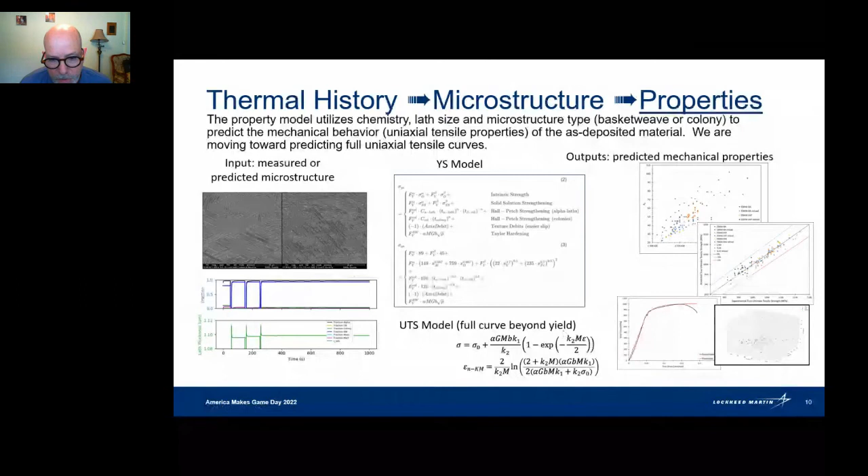Another significant thing we were able to do - I mentioned earlier that Jack Beuth's team has produced these process maps, and they were able to predict the dripping boundaries based on contours of the hot wire power and the total power versus the travel speed.

We were able to, with our image cameras, capture the melt pool image and process the melt pool characteristics of width, total area, and height of that melt pool surface area, and do that in real time. What you see in this image is the actual melt pool.

This is a reflection that's not part of our overall calculations. We were able to process this in real time, and this allowed us to close the loop on the control system itself, so that by specifying a set melt pool area and a targeted laser power condition, we could control the laser power to maintain this melt pool area.

But significantly as well was the data that we took and post-processed. Jack's team again was looking at a neural network, long short-term memory, recurrent neural network, and they were able to post-process those data.

The relevance of that is that when they did this, they came up with what they called a regularity score from this neural network. Looking at a stable bead versus an unstable bead - if you pay attention only to the straight, steady line, these others are transient at start and stop - the stable bead gave a very uniform regularity.

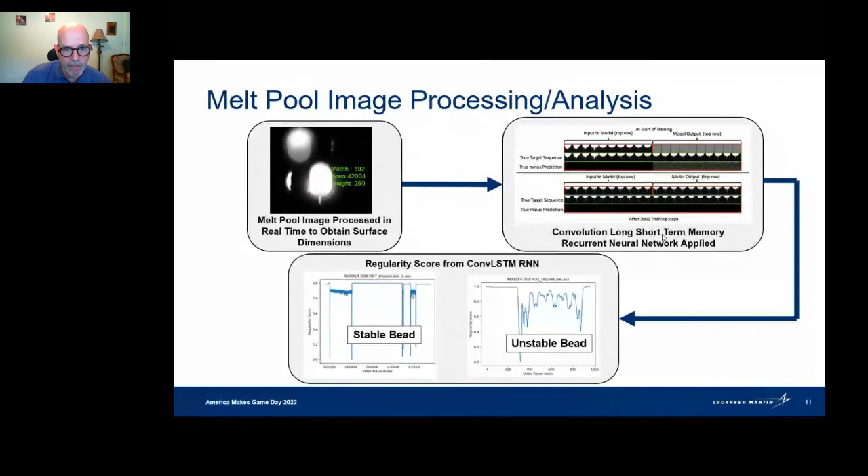I mentioned earlier the Navy demo builds. This first one we did was again because the Navy was interested in a fixed section build, so we did a single build on a round plate. It was about 45 minutes per layer built without interruption, and the whole build was about a 40-hour build. It was incremental, not a continuous build - we would stop at various layers and pick up the next day or the next morning.

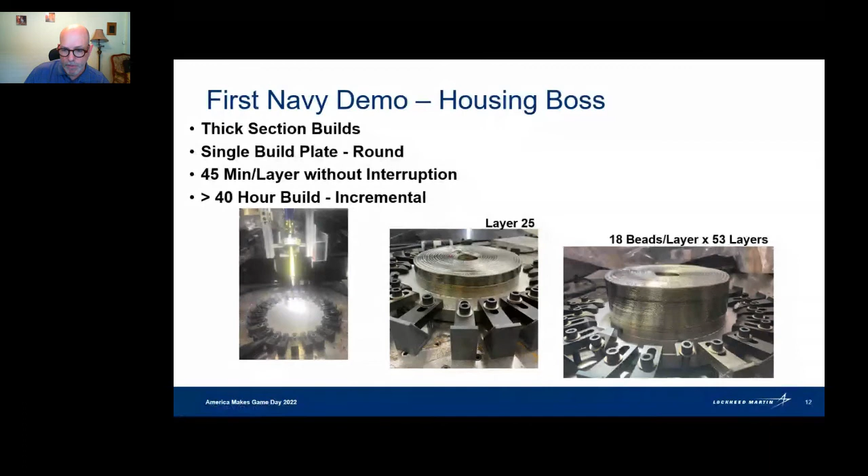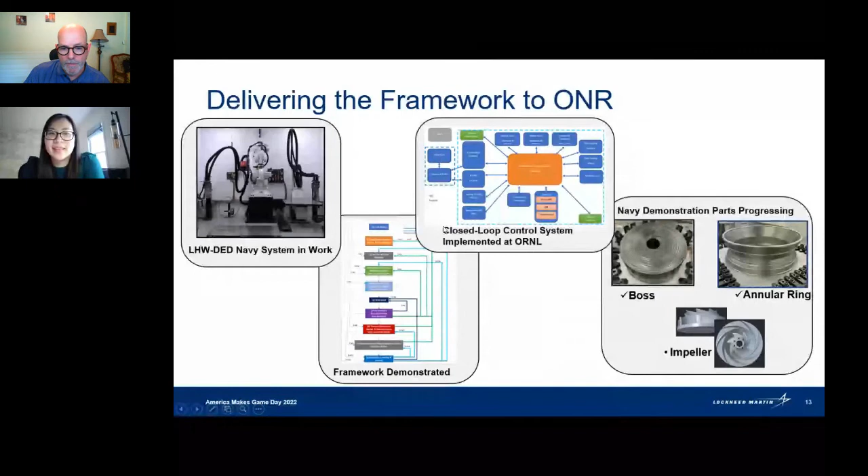I'll start it off. What I'll say, by the way, folks, is in the Q&A, upvote some of those questions while I share this very quick anecdote, which is unique to the LM team. So we have some big Navy conferences, and they always ask me to bring demonstration stuff, right? And someone said, oh, well, what about some of the things coming from Quality Made, and what about the big metal stuff? I was like, guys, I can't carry that. I have no idea how to get that there. It's a couple hundred pounds. So I thought you would find that funny, Glenn.

Yeah, we've run across the same issue exactly. These parts are not the sort of thing you go put on someone's desk. Yeah, right. No, so don't worry. That went away very quickly when I was like, that's a couple hundred pounds, and have you seen me? This is not going to work out well.